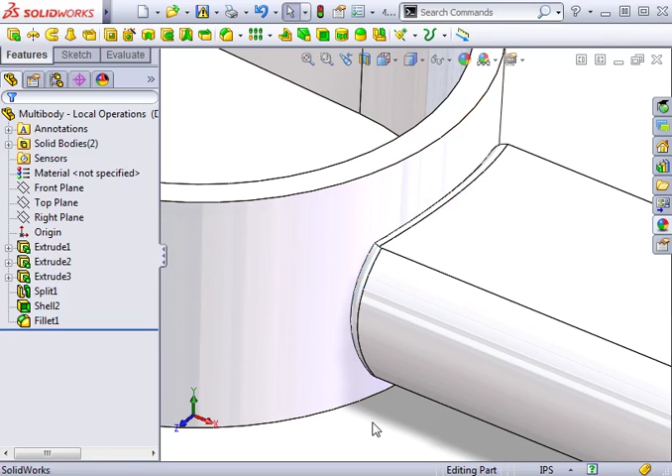In the previous lesson, we saw how adding this final fillet feature to the edges where the head meets the handle led to strange results. The results are easier to see if the solid body making up the head is hidden. Now you can see what's happened.

Since this model is made up of two solid bodies, the edges I selected when I created this fillet are not edges where the two bodies merge. Rather, they're edges that belong only to the handle portion. When I added the fillets, it's as if the head didn't exist. Just like there can be advantages to having multiple bodies, such as the results of the shell feature we saw in the previous lesson, there are also disadvantages.

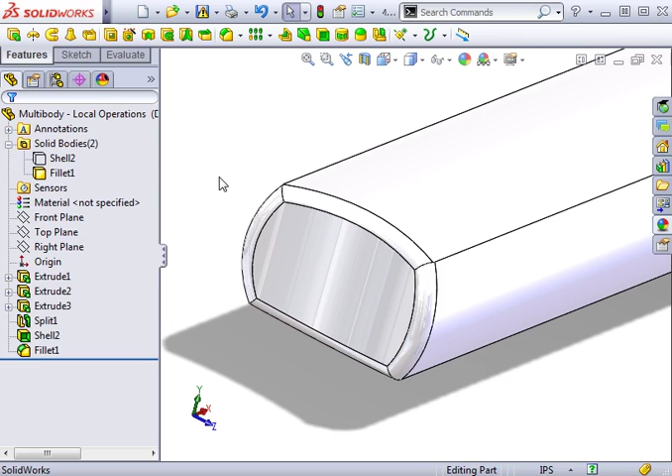Fillets and other applied features such as draft, chamfer, and shell can only be applied to one solid body at a time. Because of this, if you wish to create a fillet across multiple bodies, as I want to do here, you first have to combine the bodies into a single body. To do this, you'll use the Combine feature. You'll find the Combine feature in the Insert Features drop-down menu.

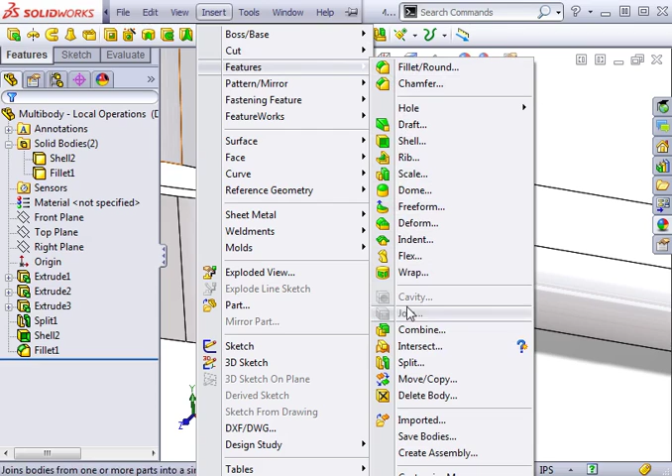You'll see in the Property Manager that the feature actually provides three types of Boolean operations: add, subtract, and common. In this case, I'll be using the Add option to add two of the bodies together. When I click OK, you can see only one body is listed in the Solid Bodies folder. Of course, the fillet problem is not resolved yet.

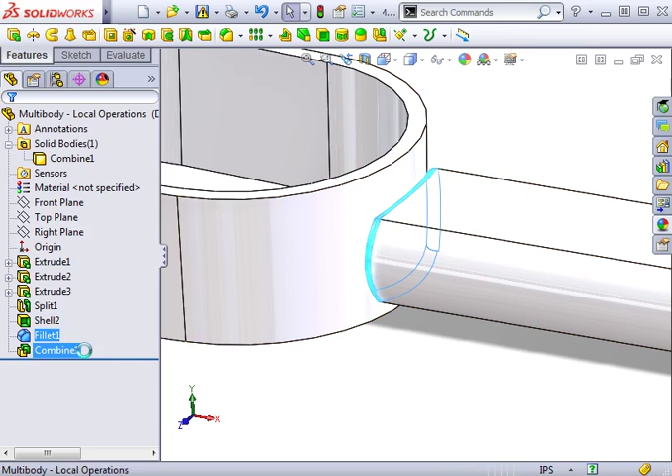The Combine feature, like any other, is time-dependent. That is, it matters where along the feature tree it's added. What I should have done is use the rollback bar to just before the fillet and executed the Combine feature there. Or I can just as easily drag and drop the fillet to appear after the Combine feature. When I do this, the fillet changes to show the result I expected.

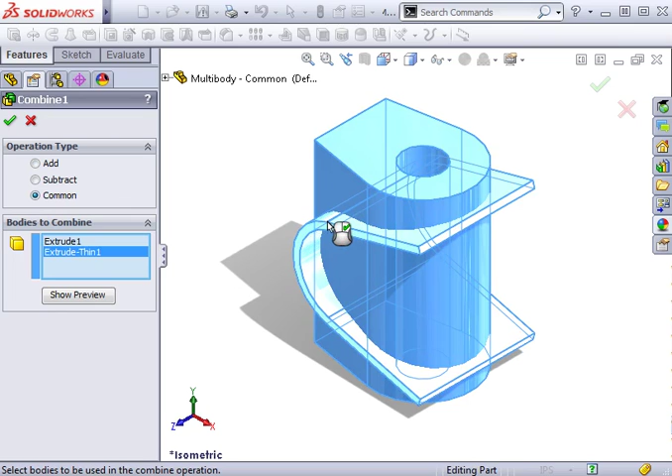Now that we've seen the Combine feature, let's talk about the other multi-body design techniques it offers. Here I have a part made up of two bodies. By using the Combine feature's Common option, you can generate bodies defined by the intersecting volume of two bodies. When I click OK, you can see the result is a single solid body.

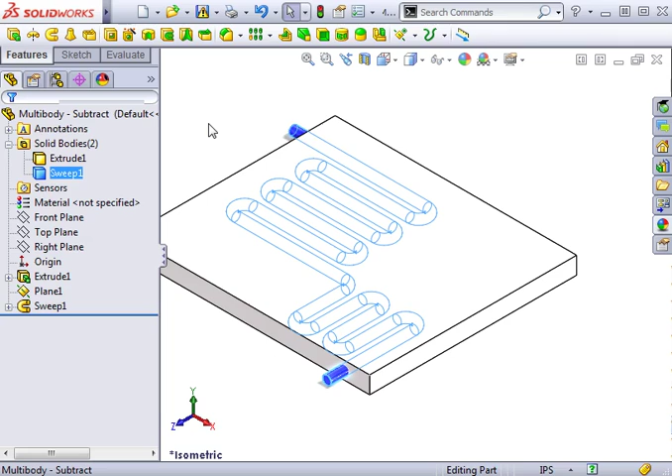The last Boolean operation offered by the Combine feature is subtract. As you can imagine, this performs the function of subtracting one solid body from another. Here I have a part made up of two bodies, one plate and a tube that runs through the plate. What I'd like to do is remove the volume of the tube from the plate. The plate can then be cut in half so that when the halves are joined together, a channel is formed through which liquid can pass.

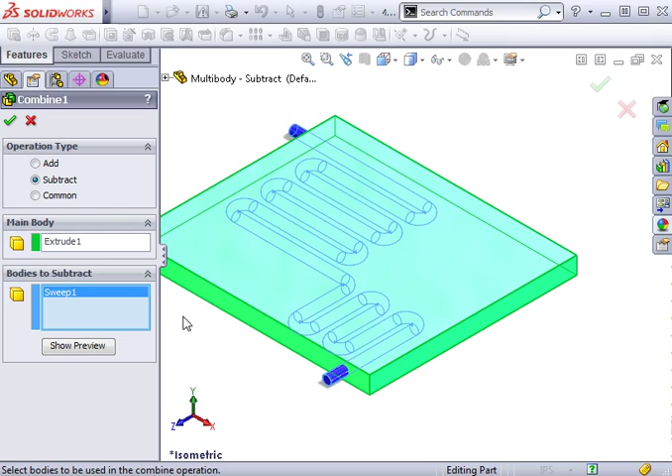I'll again use the Combine feature, this time selecting the Subtract option. The main body will be the portion I wish to keep. In this case, that will be the plate. The body I wish to remove is the tube. I'll click OK. Notice the tube body is now gone. It's consumed in the process of creating the Combine feature.

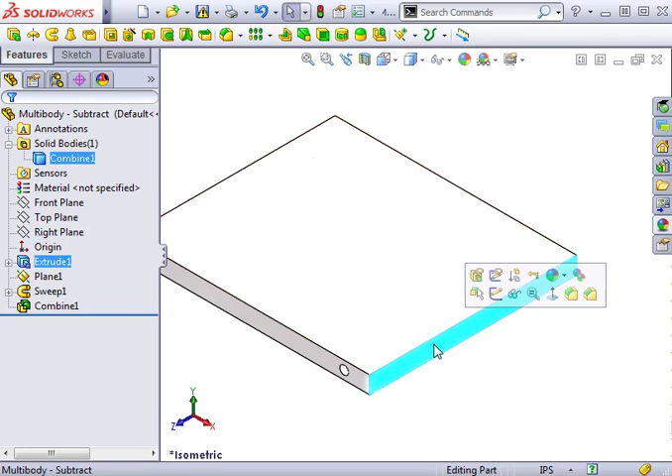A single solid body remains, and when I switch to a wireframe view, you can see the cavity left by the tube. To complete the design, all I have to do is separate the plate in half. One way to do this is to use the Split feature. I'll begin by sketching a line that divides an end face in half. I'll exit the sketch and launch the Split feature.

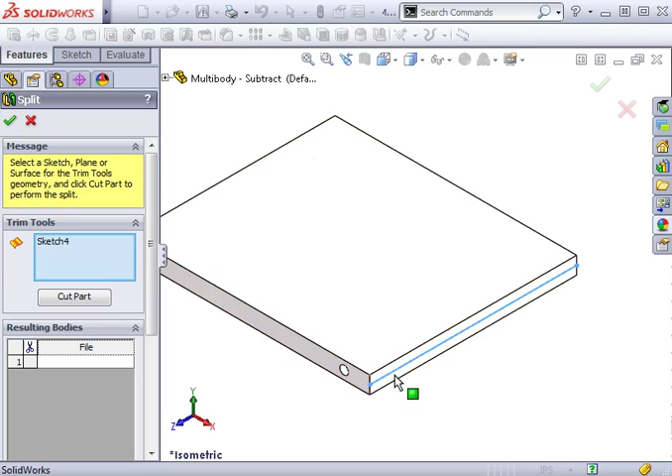The trimming tool will be the sketched line. I'll click Cut Part, select both bodies. When I click OK, I'm left with two bodies as I expected. If necessary, I can now use the Save Bodies feature to generate two individual part files and an assembly as we saw in the earlier lesson on the Split feature.